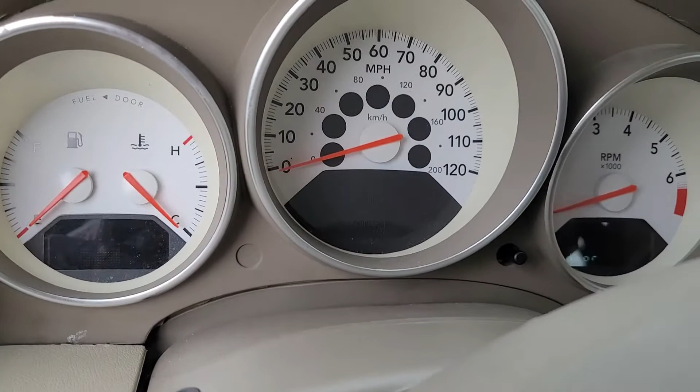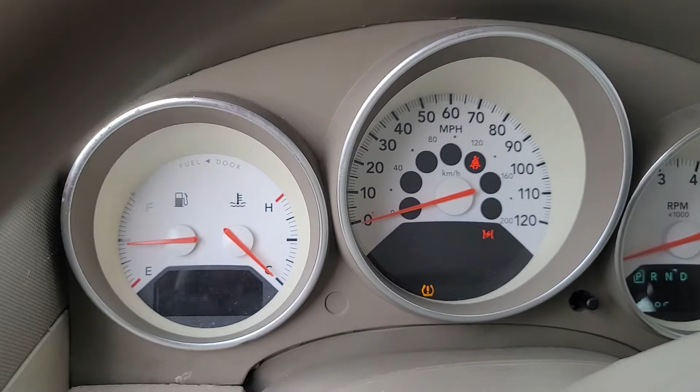Customer complaint, check engine light. It starts, it runs. So let's verify it. Key on. Let's see if the check engine light is not on. Somebody took the bulb probably. Or, yeah, the bulb is not there. But it started. It starts. I did a full scan.

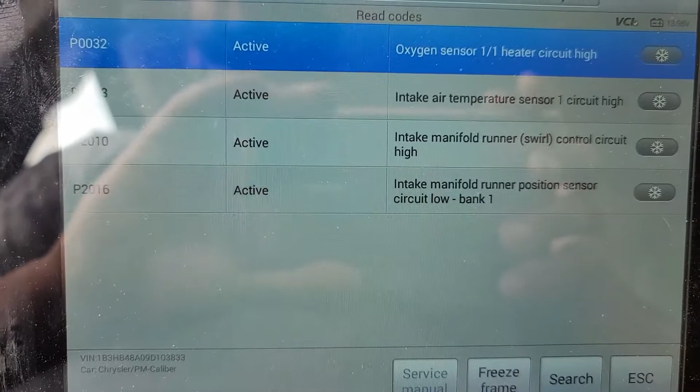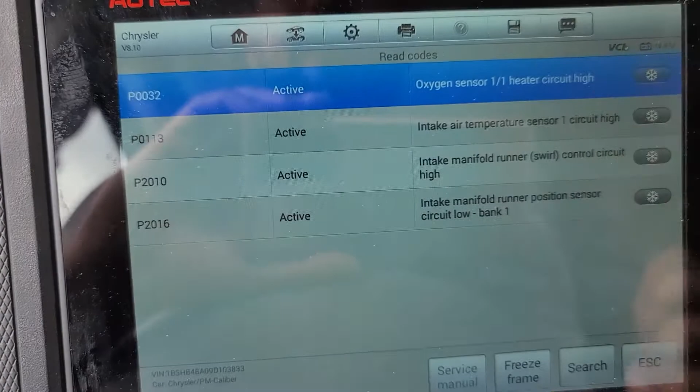I think they meant to say it doesn't pass inspection. What is this? Aftermarket. I hate it. We have 4 codes. I scanned the vehicle. Check. We have 4 codes.

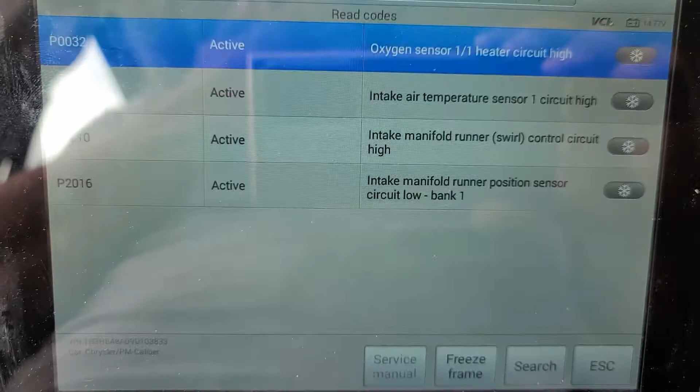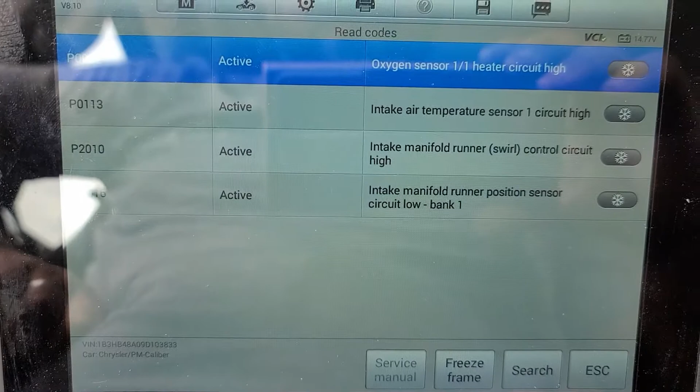P0032, oxygen sensor 1, heater circuit high. P0113, active intake air temperature sensor, circuit high. P2010, and it's an active code, intake manifold runner control circuit high. And P2016, intake manifold runner position sensor circuit low, bank 1.

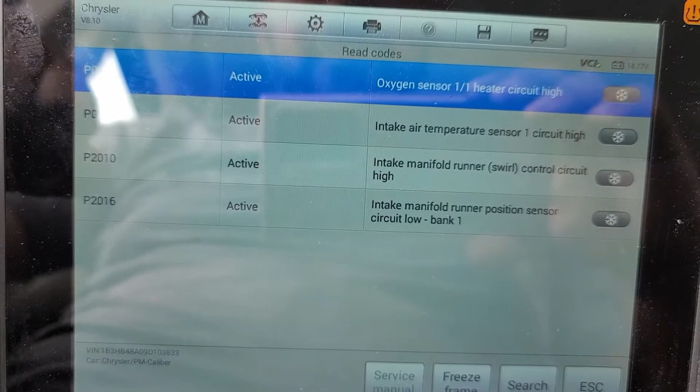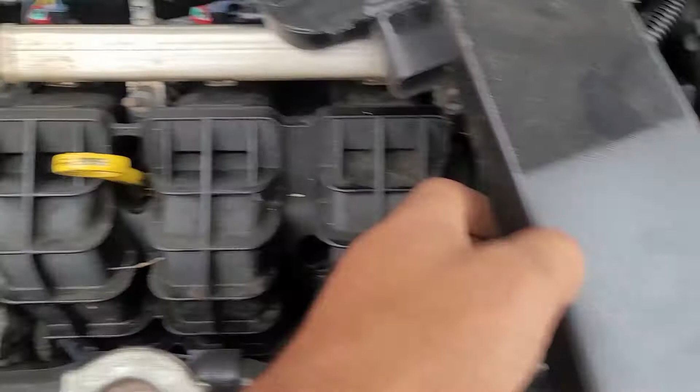Now, he did tell me that he got, this is at a local dealer, and he did tell me that he got his failed inspection. He got his mechanic to change... Oh, I didn't see that. He got his mechanic to change this and the whole runner, the whole intake manifold.

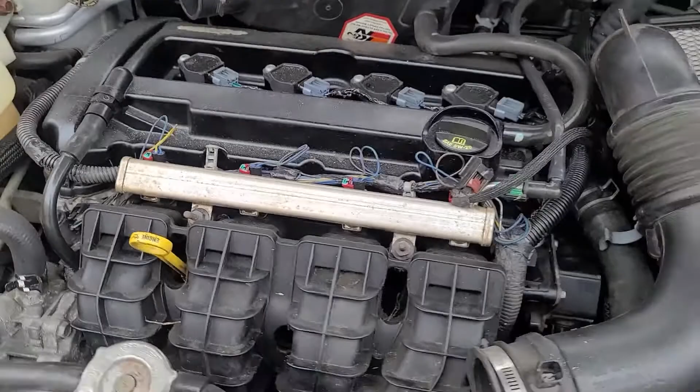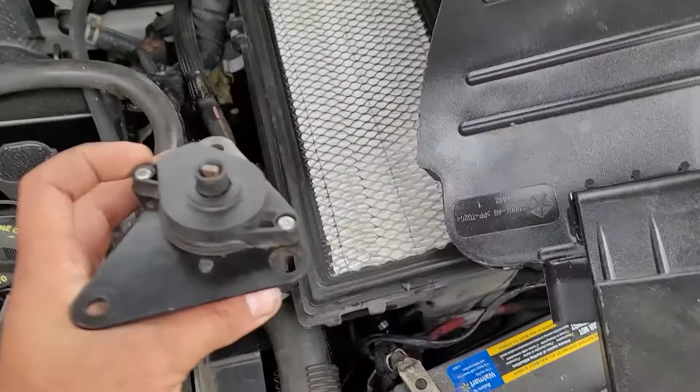Now this 2.4 engine, Chrysler and Dodge, it comes in a Sebring and in a Caliber. I think in an Avenger 4-cylinder also they put it. There's so many cars they use this engine in, and they tend actually to get stuck. The runners for the air, they tend to get stuck, and this piece also fails. But in this case, here's signs of changing. That's why we have all these codes.

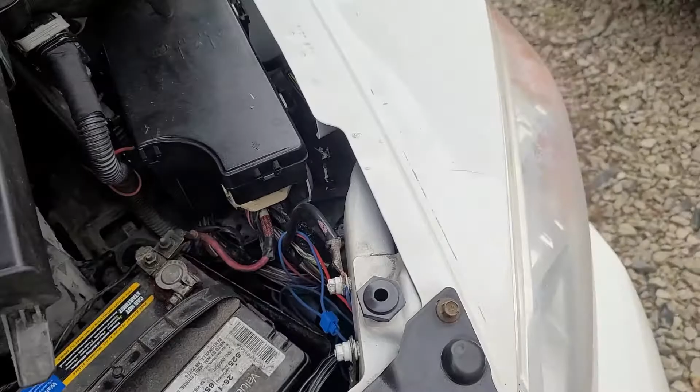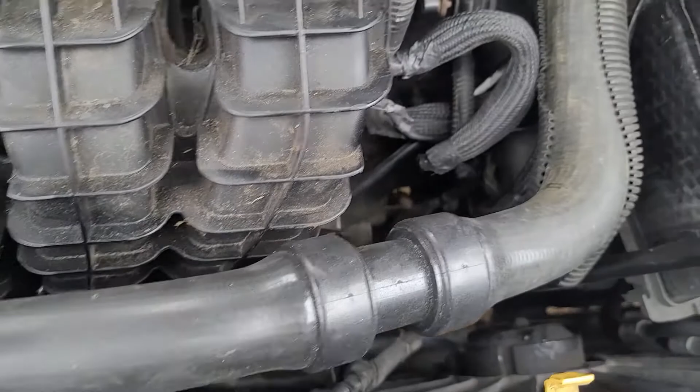Oh my God, that's another one. Look, somebody visited the junkyard. Let's see what we're dealing with here. That's not cool. I don't like it that way. Alright. So one by one, let's bring everything back to where it should be. Plug in all the sensors that they unplugged. Yeah. And see what we're dealing with.

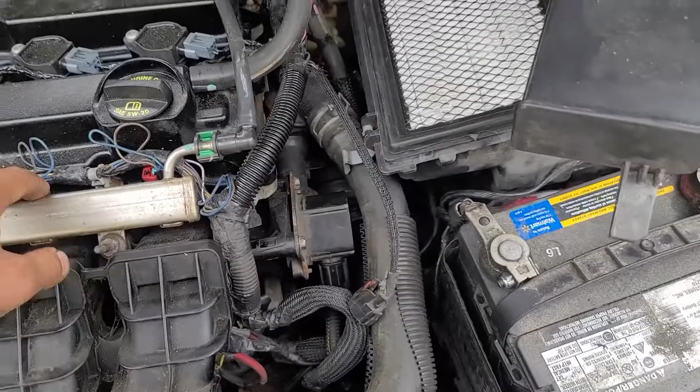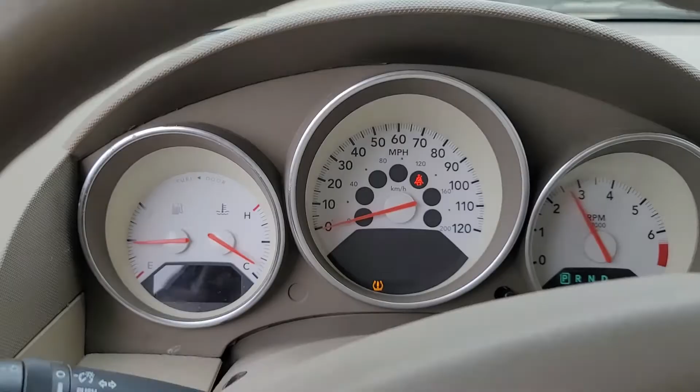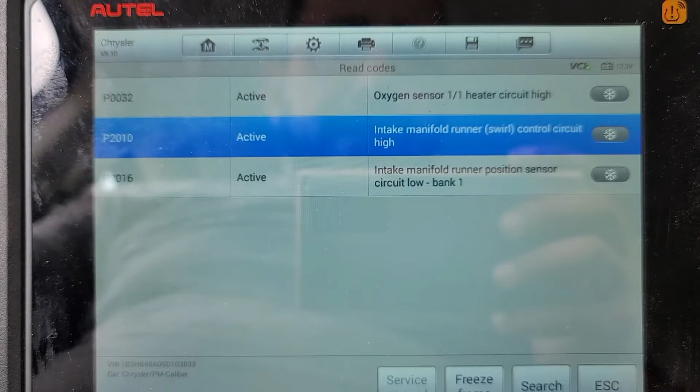Okay, so let's clear the codes. Set up the key. Alright. So it's not a stuck open code. It's the control circuit high. He thought that it was stuck open, so that's why he changed the runner and that control switch on the side. But let's dig into the 2010 and 2016.

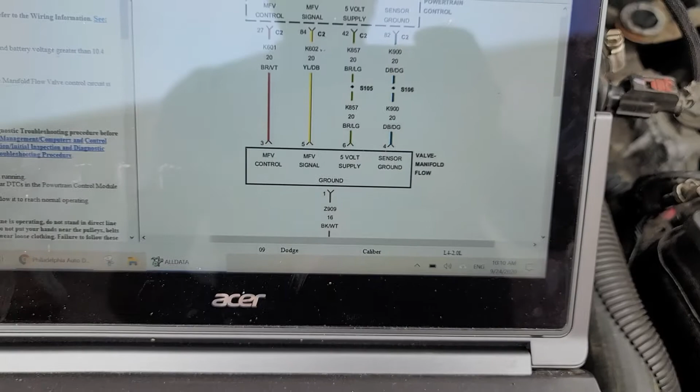Going to AllData, there is a procedure that we have to do to check. This is the wiring diagram for the harness for the control. 5 pins, 5 wires, 1 2 3 4, and this is the ground, the 5th one. 4 of them come from the engine control module, powertrain control module, and these are the 2 harnesses we're going to do our checks at. The black one here, and this one over right here that connects to the solenoid.

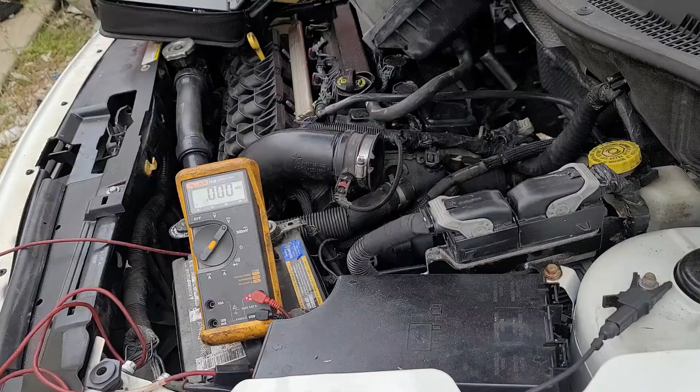Let me get the tripod out. The first thing we are going to check, after verifying the code, of course, which we did, MFV, which is the manifold flow valve. MFV control circuit shorted to voltage. Turn ignition off, disconnect the manifold flow valve connector, disconnect the powertrain control module PCM C2 harness, which should be black as we said. Turn ignition on, measure the voltage of the K601 MFV control circuit in the manifold flow valve harness connector. I'll check. Turn ignition off.

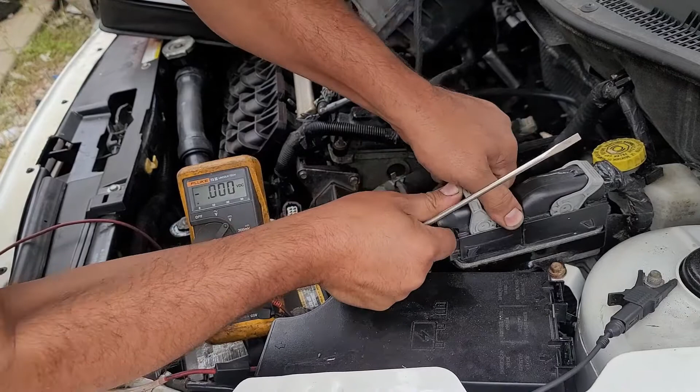Disconnect the harness. Let me do this. I think it has a lock. Disconnect the lock and black. Which one is the black one? Let's see. This is the black one. So connect this one back. Alright, now key on.

Turn ignition on. Measure the voltage of the MFV circuit in the manifold. Alright, so pin number 3, which is the top left. We're going to check the voltage. So I am hooked to ground. Check the voltage in here. We have 0 volts, so we don't have a short to voltage. Is there voltage present? No, so go to 3.

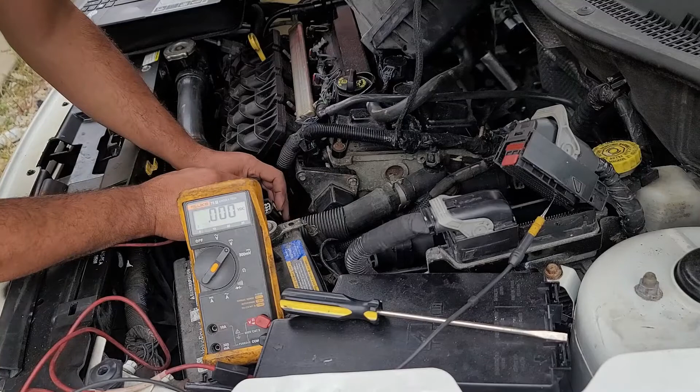Step 3, control circuit open or high resistance. Measure the resistance of the circuit between the manifold flow valve harness connector and the powertrain control module PCM connector. It should be below 5 ohms. Okay, that is going to be pin 27 and pin number 3. So 27 is... this is 1 to 24, 25, 26, 27. Should be this one. Barely touch it. Don't spread it out. And 3. What's the... Oh, my bad.

0.4. Excellent. 0.3. Alright. Here we have continuity. Here. 0.4. Okay, excellent. So this is that step. Next would be manifold flow valve.

Are we recording? Okay, yes.

Manifold flow valve. Connect the powertrain control module harness. Turn the ignition on. With the scan tool, actuate the manifold flow valve control to on, 100% position. Use a 12-volt test light connected to a ground. Check the control circuit at the manifold flow valve harness connector. Okay, so we're going to see if the computer is commanding the valve to actually move.

All right, so I had to pull the Snap-on scanner out and connect it. It does actually have the control. So flow control valve command, toggle on and off. We're probing pin number 3. Now on, that's 12 volts. Off. So we're good to go here.

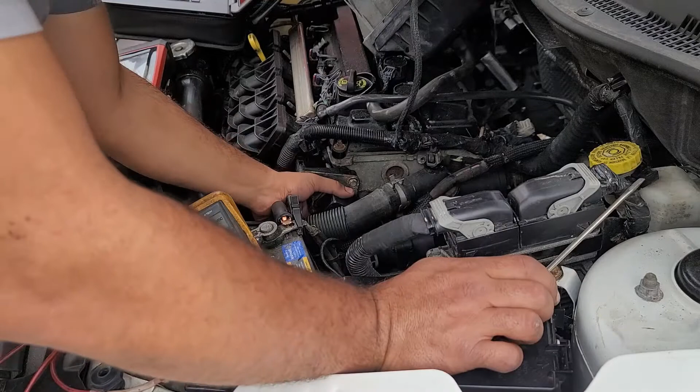By the way, it was not locked. I know I got this to unlock the lock for it. See, like that, it's loose. It's loose. Let me push it all the way in and lock it. Now I want to lock it. There you go. Now it's locked. Now let me actuate it. Let's hear it together.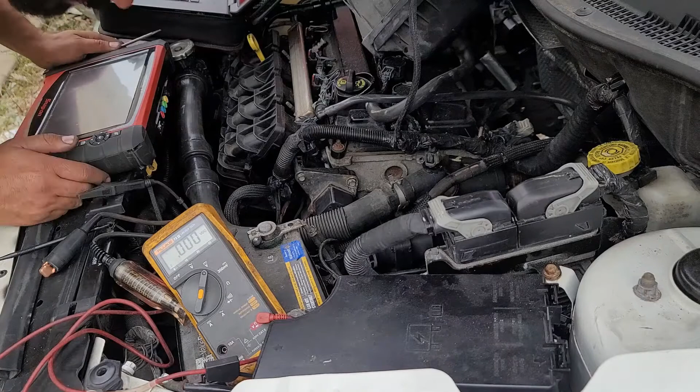Add it in here. Actually, what we can do is we can take this off, or we can use one of these here to see the procedure.

You guys in? Yes, you guys are in.

On, off. On, off. These are bad. They keep bringing bad ones. Made in China. Come on. This one's broken, the casing is broken for it, but let me just try it. Either that or we have a ground issue. I mean, it can be all three of them. Yeah, it can, but no, something's going on. Let me investigate the ground.

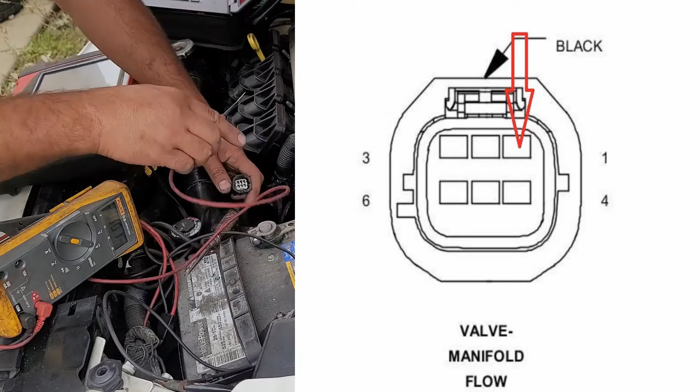Pin number 1 is the top right. Pin number 1 is this one. Do we have a reading? Yes, we do. See, we have 10.81. Why 10.81? Here we have 12 volts. So we should have 12 volts here. When I touch a ground, I should have 12 volts. No good. I think we're missing ground.

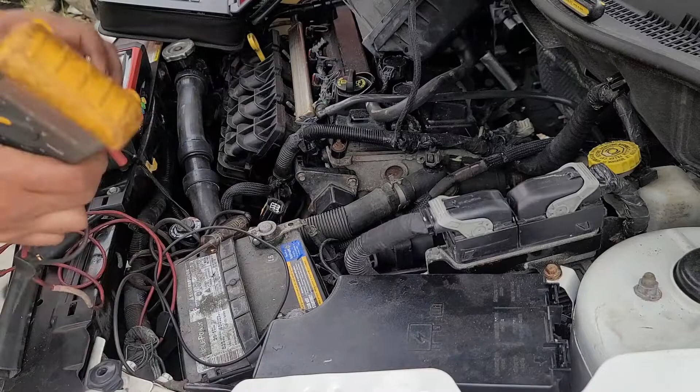Let me tell you what. I'm gonna bypass the ground. I think I can by doing this. I'm gonna use my lead as a jumper to the ground. Actually here to the ground, and this one that failed didn't work with the actuation test. Plug it and probe to pin number 1. Let me just make sure it's a black and white. You can't miss it. Black and white, pin number 1.

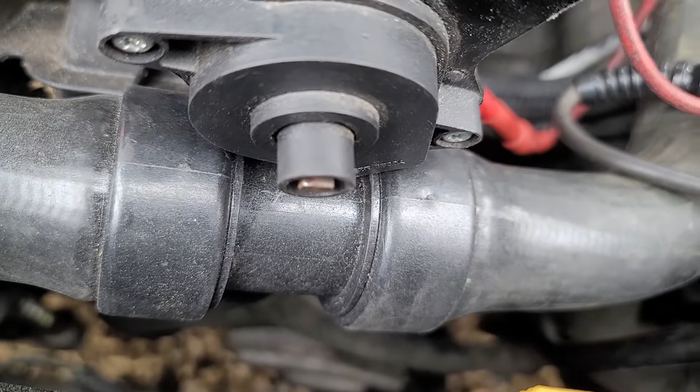Now, okay, I want you guys to hear this. I want you guys to hear this. Do I have a command off? My command is off. But hear this. See it? Okay. Watch this needle. It's not moving. Let me switch it.

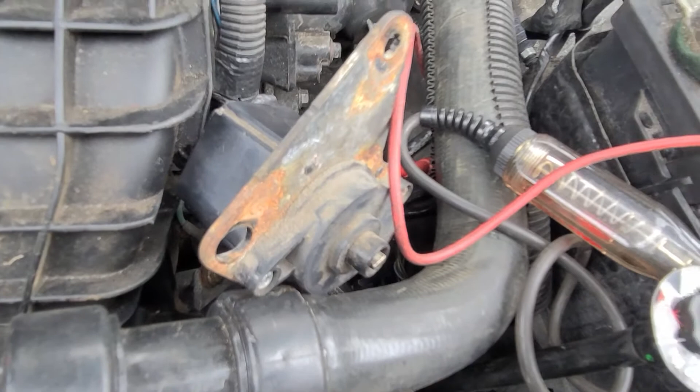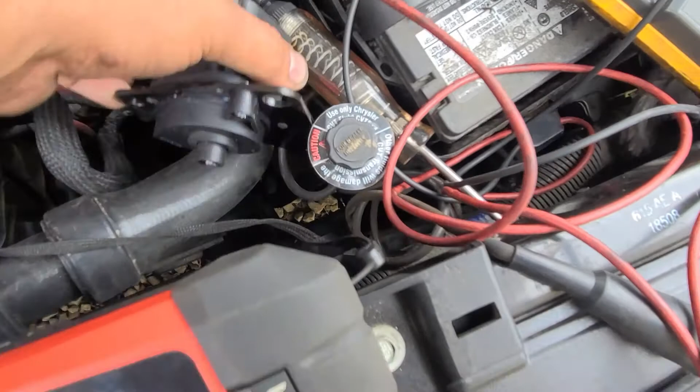I just took off the one that was here already, just to make it free. It's not on, off. No good. We just got another made in China new piece. On, and I did actually remove my jumper, so I just want to depend on the power and ground of the unit itself for now. Let me actuate it.

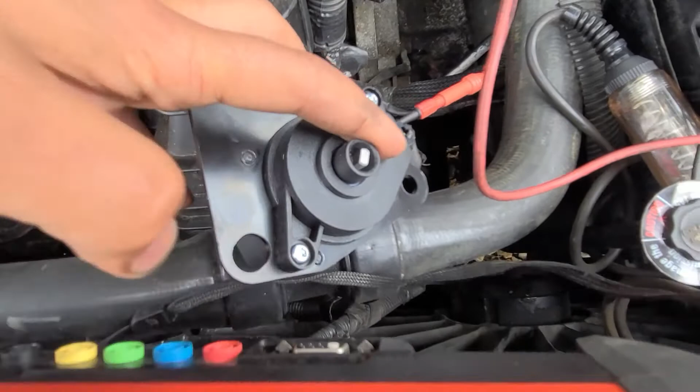Off, nothing. Let me bypass the ground. We have that buzzing sound, on, off. Okay, off, on. Why is it not flopping?

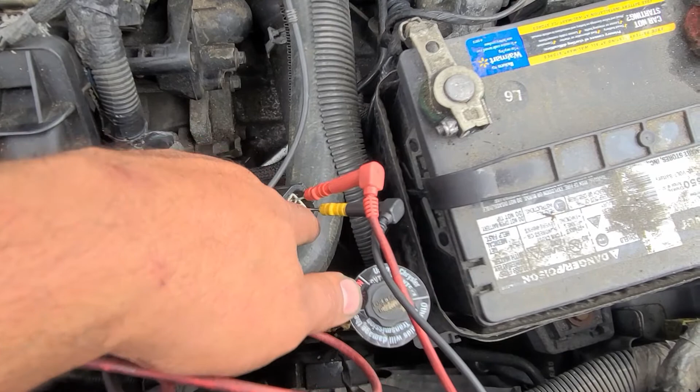So what I did so far, I probed to the control side and the ground, and I'm using my test light here. Again, on, off, we don't have a signal. Now this is off, on, off. But when I switch my ground to the main ground, now we have a signal. So we definitely have a ground issue to that valve.

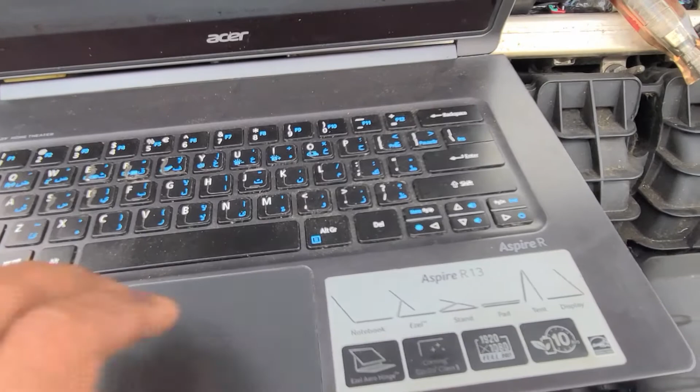Now my question is, when I plug this with bypassing the ground, why don't I see this moving? Should I take care of this first, or should I just find the ground, put everything back, and see if the computer does it? Will it depend on the other pins that we have? The control, it says control. This is signal 5-volt reference and another ground.

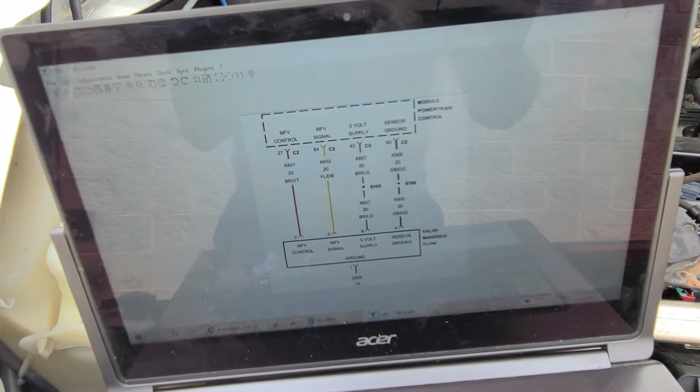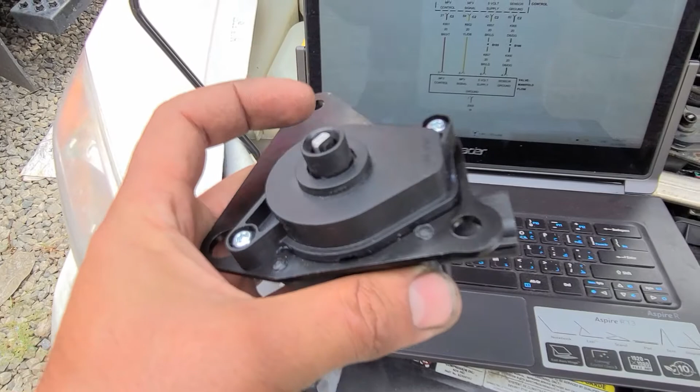Now this is the sensor ground. Could it be? No, because I think this one has an internal sensor that senses if it's open or closed. So this is the sensor ground, this is the signal 5-volt reference, and this is the control. I think this is the main ground.

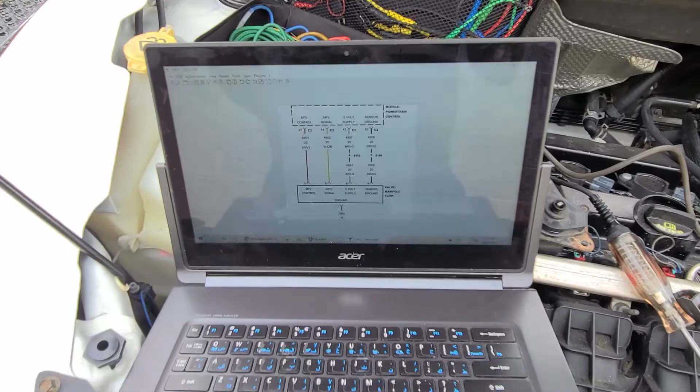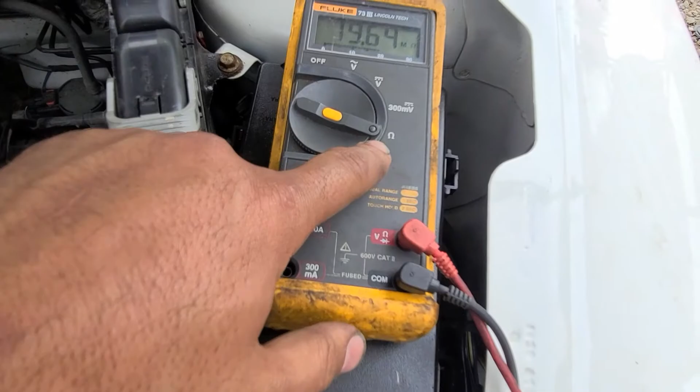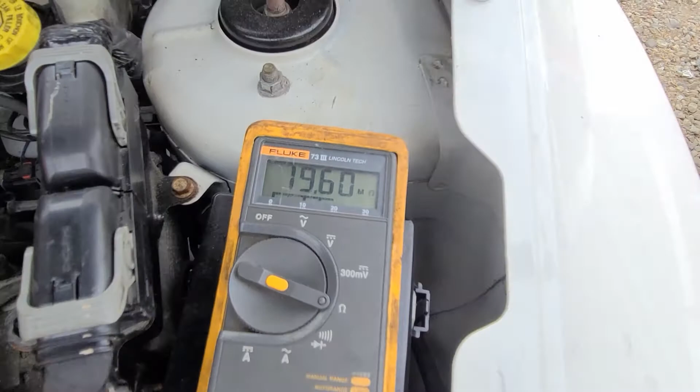G104. We have to find it, because when I measure resistance between the battery and this black and white pin number 1, I have 19.6 megaohm. That's a lot. It might be corrosion. We have to find that bad spot.

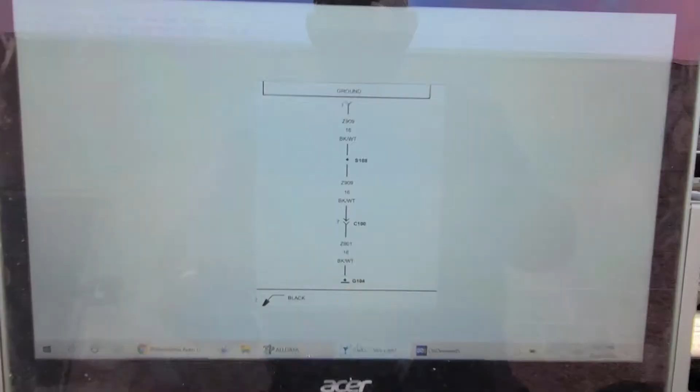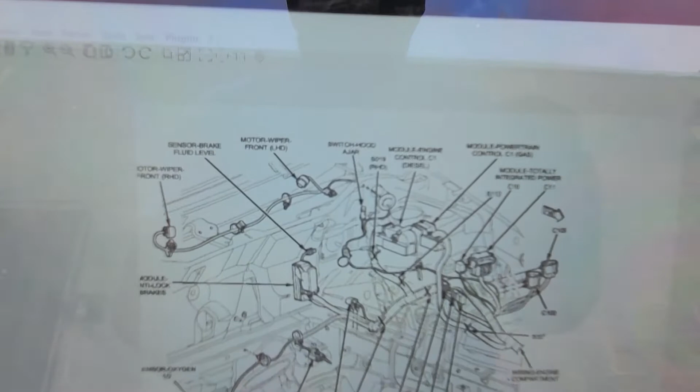I looked everywhere in AllData and Mitchell for G104. I couldn't find it. Mitchell just uses the same figures as AllData. Now I'm not gonna stop. We have 2 points we can check at: S108 and C100. I got some pictures for you guys. This is C100. It says engine compartment left rear, so it should be over there.

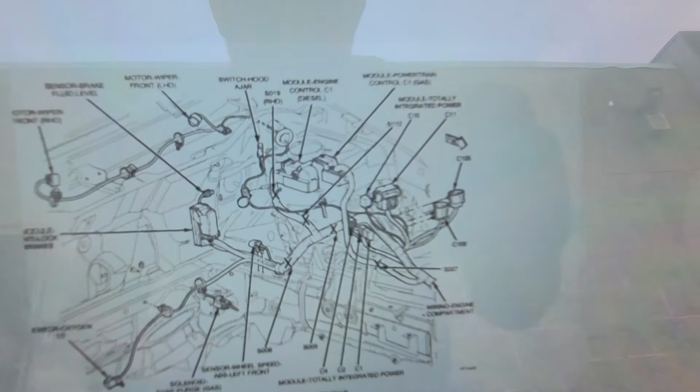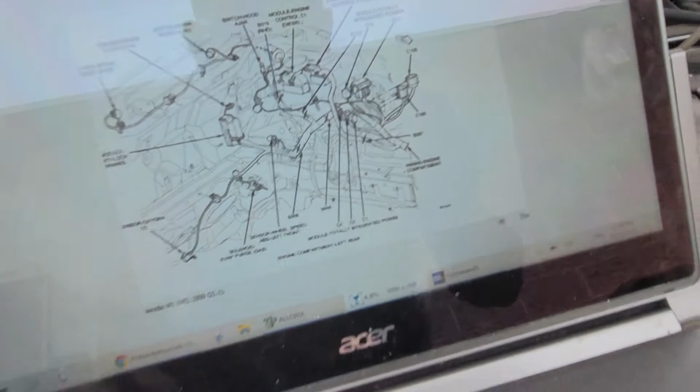Where is it? Right here it says C100. So where should that be? This is the fender. Should be here somewhere behind the battery, probably under. Now that's a connector. Here's another figure of it. Actually, this is even better. This is from the other side, so it might be behind the fender. Oh, right here. Okay, that's easy to get to. I don't want to move stuff. I don't want to disturb anything.

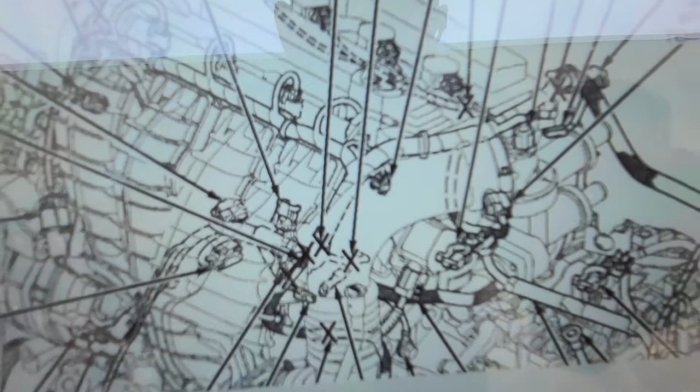And S108, right here. I don't know if I recorded this or not, but when I first came to this job, I said, well, what is going on here? I don't like it. But I didn't want to touch anything, because if it's not broken, don't break it. What I want to do is watch this while I'm moving stuff. Actually, let me put you on a tripod.

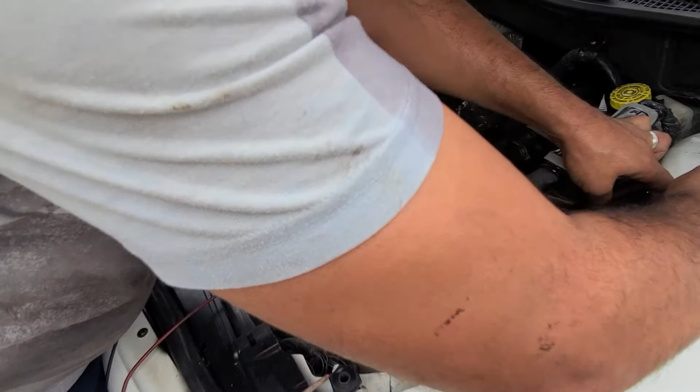All right. There we go. Move the box out of the way, and let me get to it from here. Which one? Is it the one on the left or the one on the right? It looks like the one towards the front. That's C100. It says wire and powertrain.

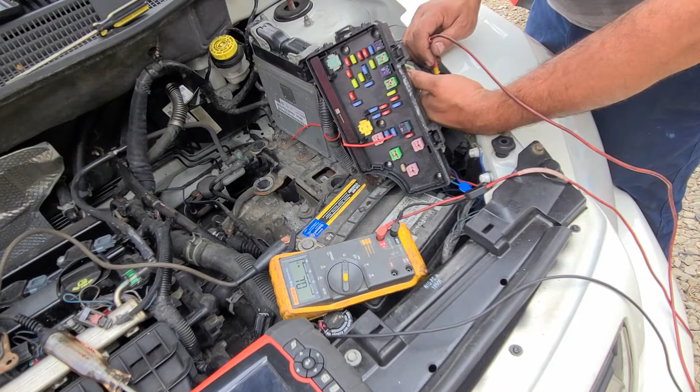Okay. Just trying to be careful not touching the positive. Black and white right here. Now what I'm going to do, I'm going to move this out of here and measure here. Okay. So even here we have it.

Okay, that means our diagram, C100. Now I bet you if I do C100 and the harness, let's do that. Let's do between the harness right here and C100. Okay, now that's acceptable. Do you guys see it? That's what I need to see all the time. That means from the harness to C100 is good.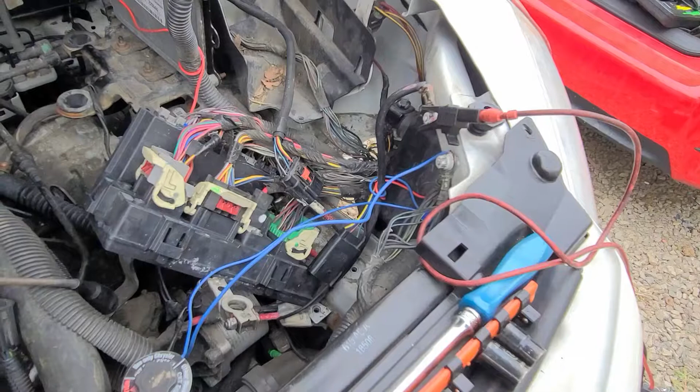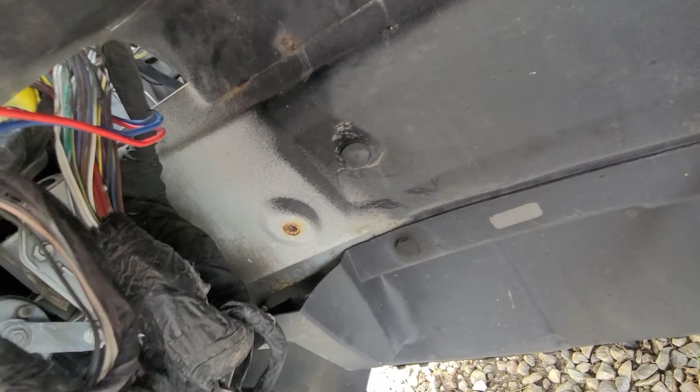So our problem is between C100 and the ground itself, G104, which I cannot find. Let me see if I can follow this harness. Six months later. But guys, I gave up. I couldn't find that, and I'm gonna have to expose a big portion of the harness to find it, and it's only here between this harness right here, between this and this.

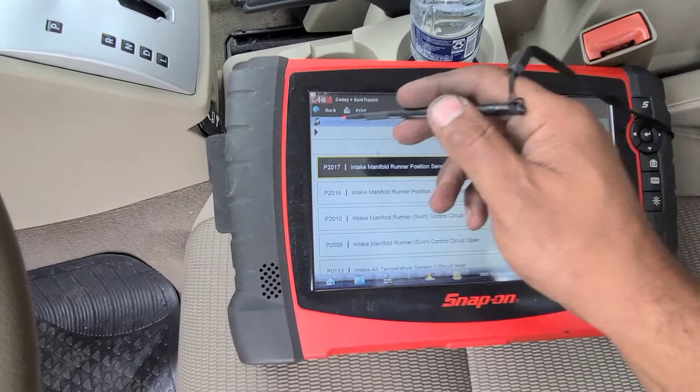So what I'm going to do, I'm gonna bypass it, put everything back, do our checks, clear the code, see if it comes back on. Everything back on. I bypassed that piece right here in the harness and right here to the body. So let's go clear the codes and see if that code or those two codes come back on. Codes, clear codes, yes, continue, codes, intake manifold runner position sensor circuit low.